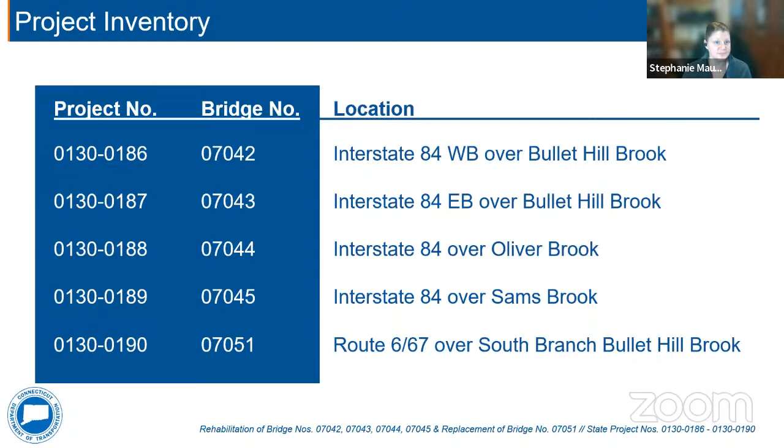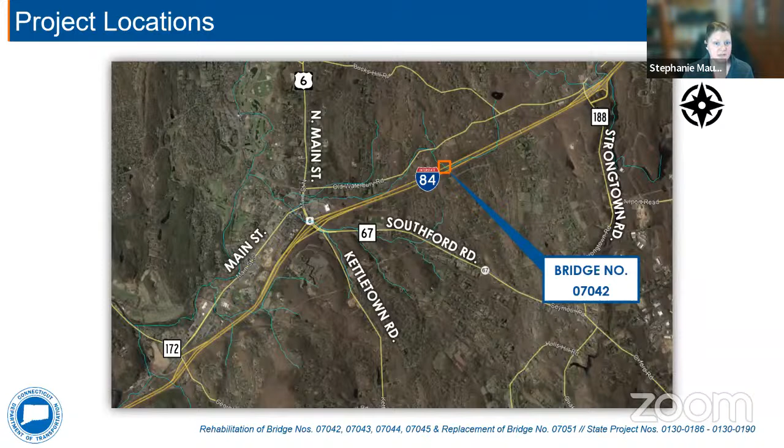We've provided this slide to help you get your bearings along the I-84 corridor. We'll start with bridge number 7042, placed along Bullet Hill Brook. You'll see that Bullet Hill Brook is a circuitous brook that goes underneath I-84 and then back through the eastbound lanes and then the westbound lanes. Bridge number 7042 refers to only the portion that traverses the I-84 westbound lanes in this location.

Next, you'll see bridge 7043 just upstream of that, and it crosses only the I-84 eastbound lanes.

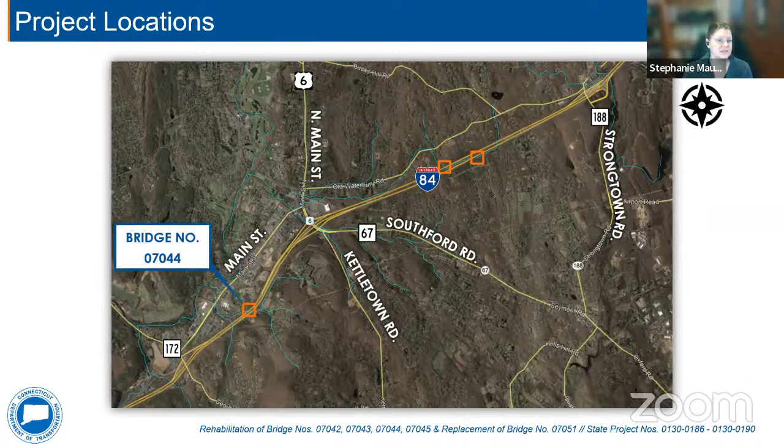Next, we have bridge number 7044. This brings Oliver Brook across both lanes of I-84.

And now we have bridge number 7045. This conveys Sam's Brook beneath I-84, both lanes, both directions.

And lastly, we have bridge number 7051. This is the bridge that crosses beneath the intersection of Route 6 and 67 and the I-84 eastbound ramps.

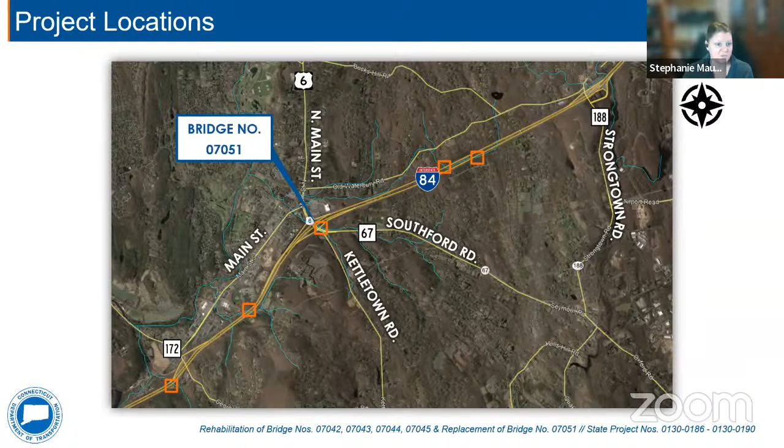During the course of this presentation, you may hear us use terms that aren't necessarily familiar to you, so I'd like to introduce you to them before moving on. You've heard me referring to bridges because the Department of Transportation considers all culverts over 6 feet in diameter a bridge. A culvert is essentially a large pipe. Each of our projects tonight are culverts.

In this figure, you can see the pipe beneath the roadway, supported at the outlet by an end wall, or a wall that's built to surround the pipe. There's also a head wall at the inlet, which you can't see. And each have wing walls, which support the embankment surrounding the pipe.

You will hear us referring to the invert. This is what we call the lowest point of the pipe, or the flow line, referring to where the smallest amount of water flows within the pipe.

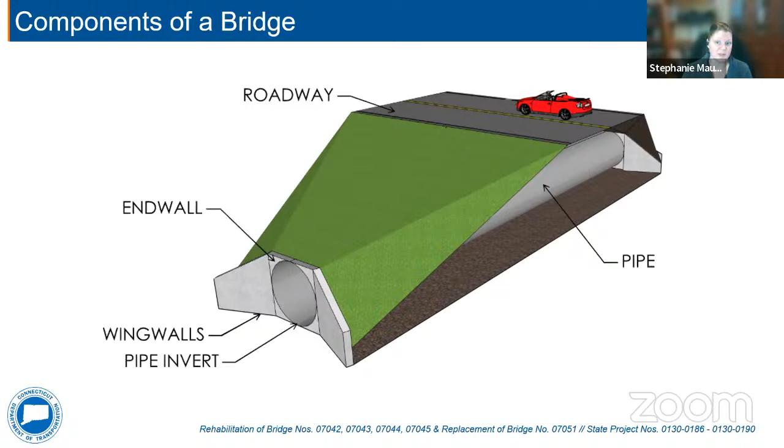All 5 of our bridges today were built in 1961 with asphalt-coated corrugated metal pipes. The first 4 are beneath Interstate 84, which has an average daily traffic of approximately 72,000 vehicles per day. These bridges range in diameter from just over 6 feet to 10 feet, with lengths ranging about 130 to 325 feet. The bridges are supported on each end by either concrete cradles and collars or head walls and wing walls.

A concrete cradle can be seen in the lower left corner. It's basically a large block of concrete that is set in the earth and the pipe sits on top of it. This type of supporting structure is accompanied by a concrete collar, as seen in the center right photograph. The pipe itself is cut back along the slope, also called a mitered edge, and concrete is poured around it to stabilize the earth around the pipe. The head wall, end wall, or wing wall type of structure is shown in the upper left-hand corner.

Each of these structures are beneath approximately 8 to 30 feet of fill.

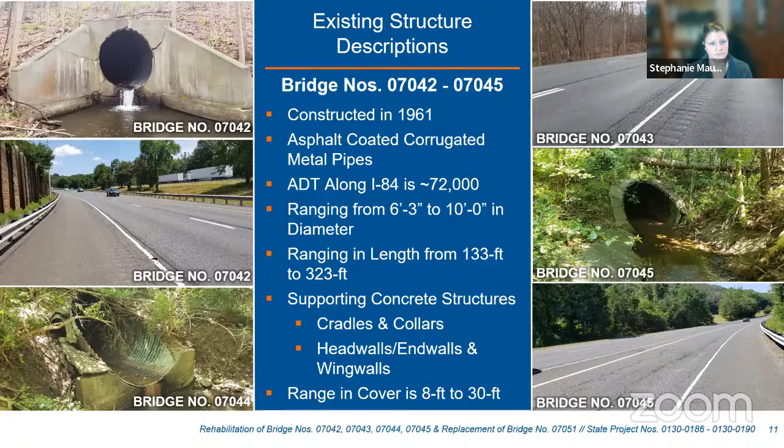The purpose and need for these projects is essentially to address the structural condition of the pipe. The state performs biennial inspections on all bridges in the state and rates each component of the structure on a 0 to 9 rating scale, 0 being that the bridge has failed and 9 being the bridge is brand new. Our ratings here range between 3 and 5, where 3 is serious condition, 4 is poor condition, and 5 is fair. For relevance, generally a brand new bridge will bring the structure up to a rating of 7 or 8 once we rehabilitate it.

So here we address the invert deterioration that is due to rust and abrasion with voids beneath the structure. You can see that in the middle left picture. We also have cracking and separation of the supporting structures. You can see that on the top left for the cracking within the wing wall and head wall. And then on the bottom right, you can see that the concrete cradle and collar has separated from the structure.

We also have perched outlets out there with these bridges. You can see that in the lower left picture. Basically, the water scours or washes away the soil at the outlet around the supports, causing a waterfall effect. This continues to erode the earth below the structure, called undermining. Sometimes we see a loss of backfill, which is the soil around the pipe or behind the structure, and it seeps through these perforations, which can cause pipe deformities.

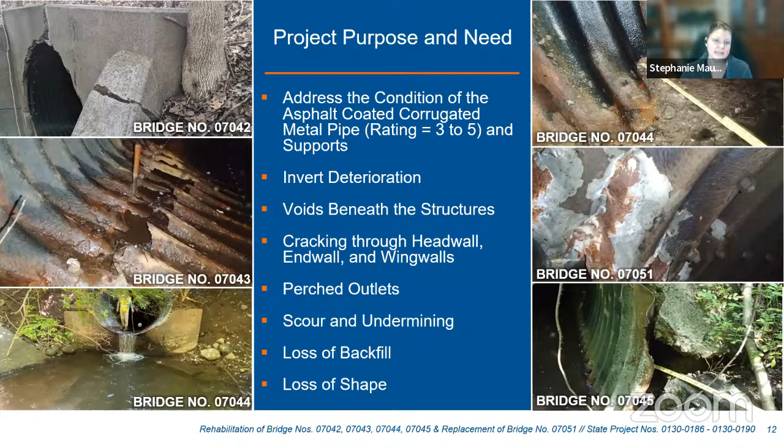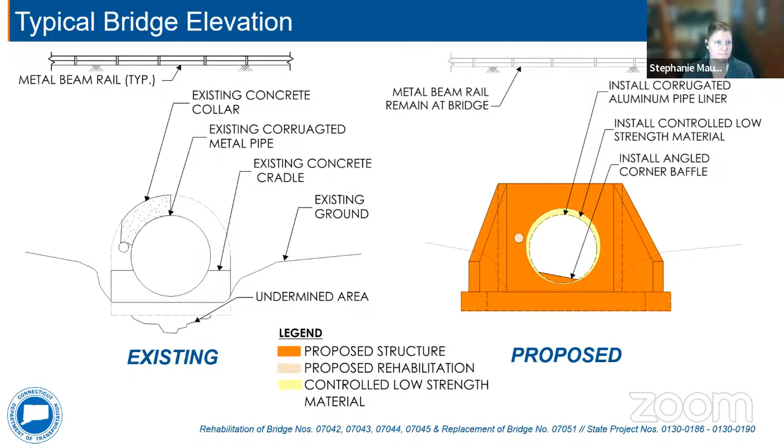For the next several slides, I'll walk you through the process of rehabilitating a culvert. This does not represent any single bridge tonight, but it will act as a conglomerate of the different parts that may be part of one project or another, essentially just trying to walk you through what might be out there.

We'll begin with the existing longitudinal section. Essentially, we are cutting through I-84 perpendicular to the travel direction. So again, this is what our existing bridge would look like. We would begin by cleaning the pipe itself and filling any voids around and beneath the pipe.

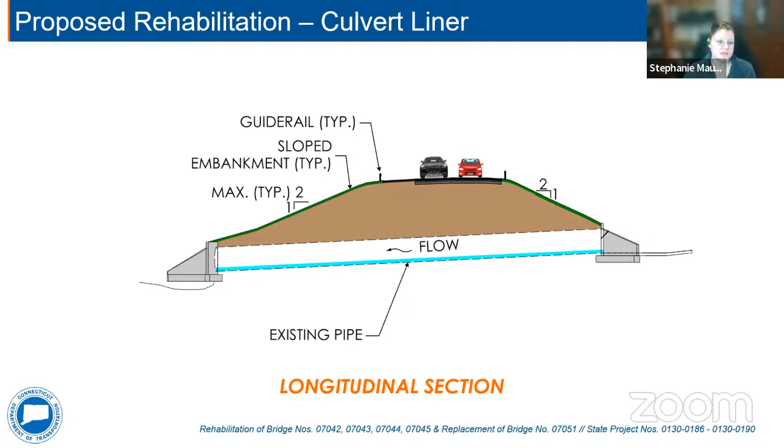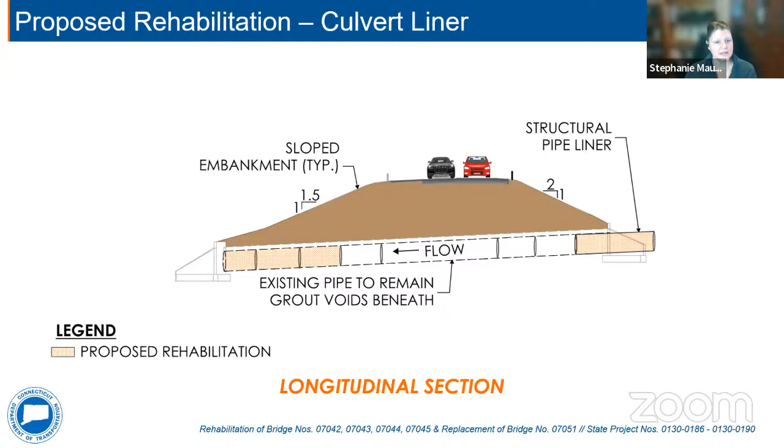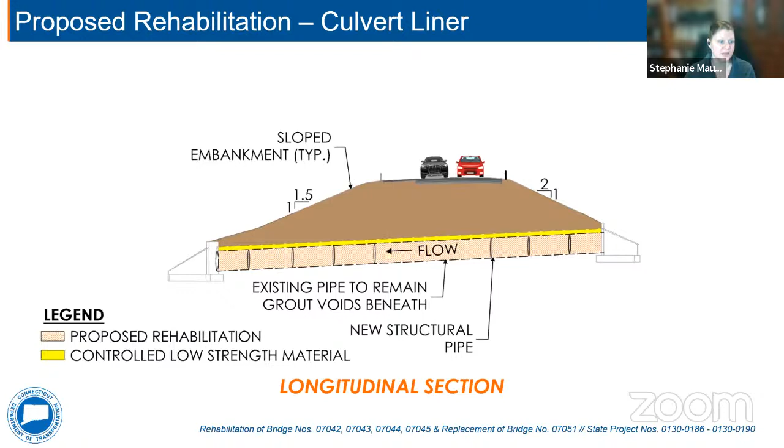Slip lining the structure is what we'll do, essentially inserting a smaller pipe within the larger pipe, connecting it piece by piece. Once that is finished, we would fill the annular space, or the space between the smaller pipe and the larger pipe, with controlled low strength material.

Some of our projects do have concrete lined channels at the entrance, and we will be looking to remove that channel essentially to aid in fish passage. It does exist for 2 out of 5 of our structures.

And then we would construct the new head wall and wing wall. Once that is complete, we would restore the channel with boulders and natural stream bed material.

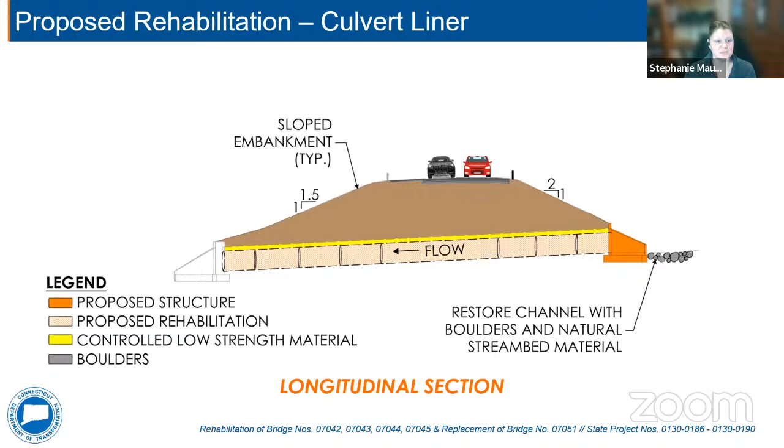Next, we would look to construct the new end wall and wing wall. You can see that now bright orange to the right.

And then lastly, for some of these projects, we will be installing a concrete fishway. Essentially, that acts as a fish ladder to also aid in fish passage. We'll be doing that for 2 out of 5 of our structures tonight.

As you can see, the work is done from below and is not anticipated to affect mainline traffic on I-84 during peak hours. Next, I will take you through each individual project.

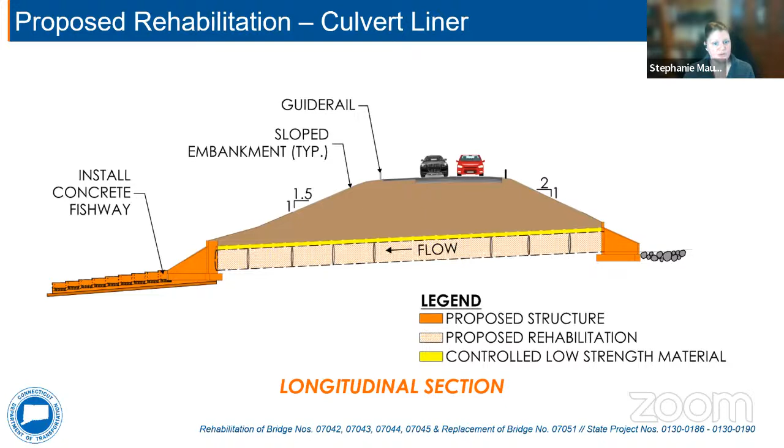To start with, we have state project number 130-186. This is bridge number 7042. It's Interstate 84 westbound over Bullet Hill Brook.

So the aerial image that you see on your left screen, you can see I-84 bisecting the image diagonally, and Bullet Hill Brook is shown with the teal blue patterned line, flowing from east to west. This bridge is about halfway between exits 15 and 16.

As you can see in the top right, this bridge does have the traditional end wall, wing wall, and it has a perched outlet. In the lower right, you can see that the entrance is lined with a paved channel that we'll be removing for this bridge.

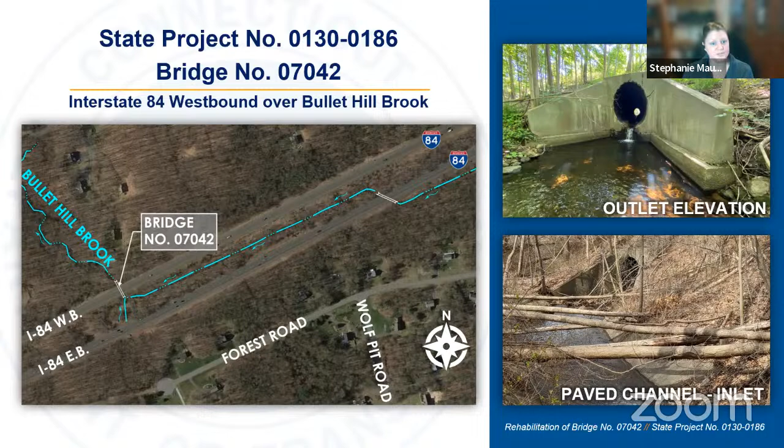As I stated before, during construction, a portion of the guide rail will be removed and temporary traffic barriers will be in place. Temporary off-peak lane shifts may be needed for site access.

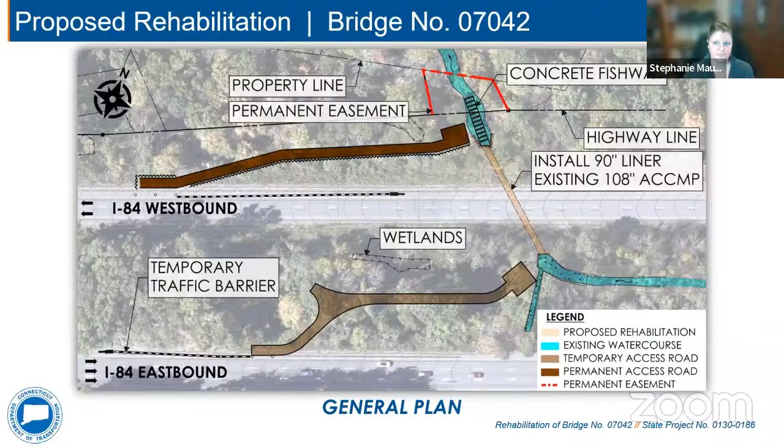We do not anticipate any utility impacts for this project. There are 3 Connecticut Department of Energy and Environmental Protection permits. I will refer to the agency as Connecticut DEEP, or just DEEP, moving forward in this presentation. These permits are individual inland wetlands, stormwater discharge, and the pre-construction notification.

The pre-construction notification for the United States Army Corps of Engineers is necessary as well, and I will refer to them as U.S. Army Corps on future slides. As noted in the previous slide, there will be 1 permanent easement for the concrete fishway installation and maintenance.

For this project, we carry an opinion of probable cost as approximately $2.8 million. It is currently 100% state funded, and construction is anticipated to begin in the spring of 2026.

Next, we have state project number 130-187. This is bridge number 7043, Interstate 84 eastbound over Bullet Hill Brook.

Again, you can see the same image here with I-84 running diagonally across your screen, and Bullet Hill Brook is in teal, flowing from east to west.

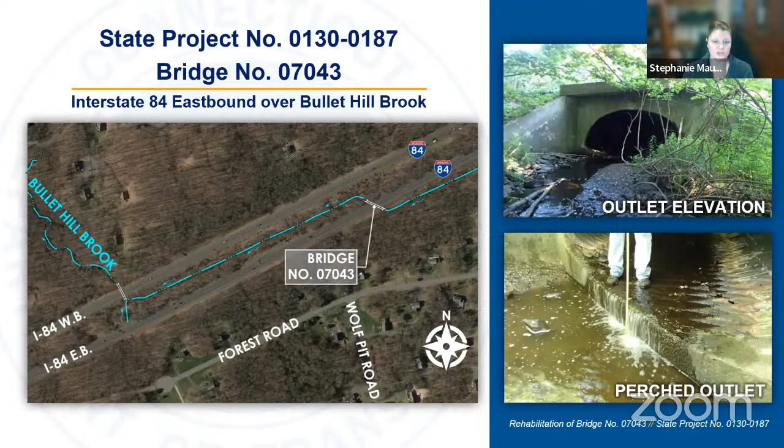Again, I-84 runs left to right through the center of the image. As stated previously, we are looking to repair the support structures. We will slip line this one as well, this one's an arch. The existing 112-inch by 75-inch arch will be lined with a 79-inch by 68-inch liner.

Then we will look to install rock weirs to aid in fish passage because the perch doesn't warrant a fishway, but it still needs to allow fish to pass. You can see in the bottom portion of your screen, we will have a right-of-way impact, which is a temporary easement for this case. It's for grading to restore the embankment and maintain the flow pattern of the brook.

We again have 2 access roads. Downstream will remain for maintenance, and the upstream access road will be temporary. During construction, a portion of the guide rail will be removed and temporary traffic barriers will be in place. And we have off-peak lane shifts that may be needed for site access.

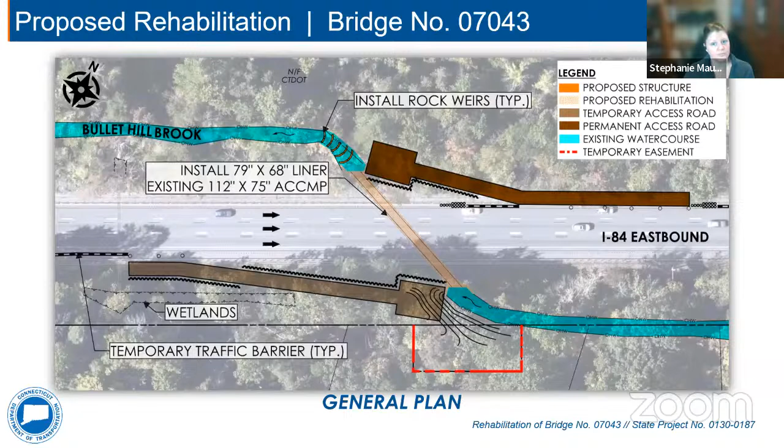We do not have any anticipated utility impacts. We are again looking at DEEP permits, individual inland wetlands, pre-construction notification, and the U.S. Army Corps pre-construction notification as well. As stated previously, we do have one single right-of-way impact. It is a temporary construction easement.

The anticipated probable cost for the structure is approximately $2.2 million. Currently, it is 90% federally funded and 10% state funded. Construction is anticipated to begin in spring of 2026.

Next, we have state project number 130-188, bridge number 7044. This is Interstate 84 over Oliver Brook. Bridge 7044 conveys Oliver Brook beneath 84 near Peter Road and the Rochambeau School. At the top right, you can see this one has a cradle support and a significantly perched outlet. The picture on the lower right shows a concrete drainage channel alongside the highway that has been washed out and is no longer functioning as it should.

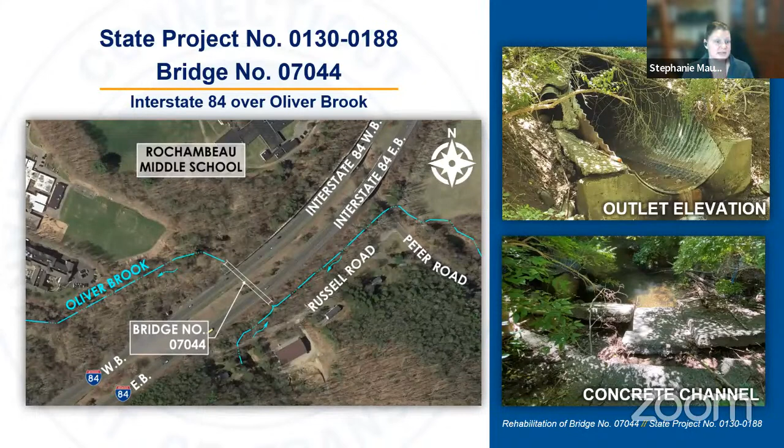Again, I-84 runs through the center of the image. For this bridge, we are looking to repair the support structure at the inlet and install a trash rack. We will be slip lining the pipe, replacing the structure at the outlet, and adding a concrete fishway. The liner size is going to be a 108-inch liner inside of a 120-inch pipe.

We are looking to reroute the damaged concrete swale and rehabilitate it using riprap or large rocks to slow the water. The concrete fishway will require 2 permanent easements for construction and maintenance. 2 permanent access roads will be constructed along the shoulders of I-84 and will remain for future maintenance. During construction, a portion of the guide rail will be removed and temporary traffic barriers in place. And again, we will have off-peak lane shifts possible for site access.

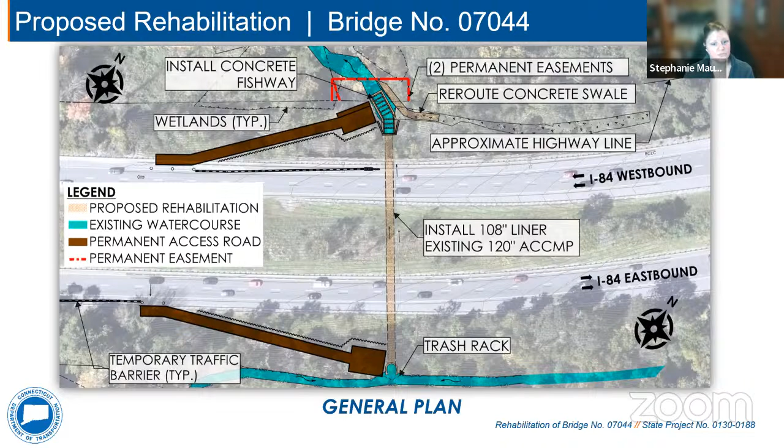We do not have anticipated utility impacts for this location. We do also have the anticipated environmental permits, which are the Connecticut DEEP Individual Inland Wetlands Permit and pre-construction notification, with the U.S. Army Corps pre-construction notification as well. As stated, we have 2 right-of-way impacts, permanent easements for the concrete fishway for installation and maintenance. The anticipated opinion of probable cost is just under $3 million, currently 90% federal funded and 10% state funded. Construction is anticipated to begin in spring of 2026.

Next, we have State Project 130-189. This is bridge number 7045, Interstate 84 over Sam's Brook. As you can see, it runs diagonally in the aerial image, at exit 14 between the on-ramp and off-ramp of the eastbound lanes. And for this one, it also has the concrete inlet that will be removed.

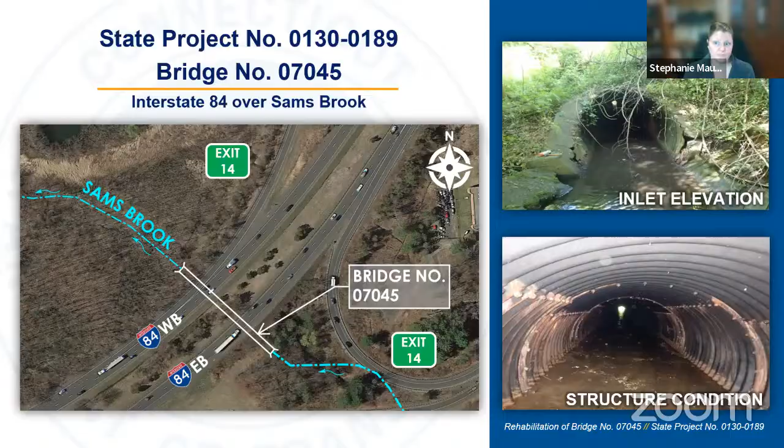Here might be a better image of this structure. We are looking to slip line this structure as well. We have an existing 84-inch pipe that we will be lining with a 66-inch liner. This structure does have the concrete collar and cradle, and we will be replacing these structures with the end wall, head wall, and wing walls. We may need to reroute the bituminous swales that come into the inlet, depending upon the placement of this structure.

We are looking to have 2 access roads. The downstream access road will remain for maintenance, and the upstream access road will be temporary. And again, during construction, a portion of guide rail will be removed along the on-ramp, and temporary traffic barriers will be in place. Ramp lane shifts and shoulder closures are anticipated for site access.

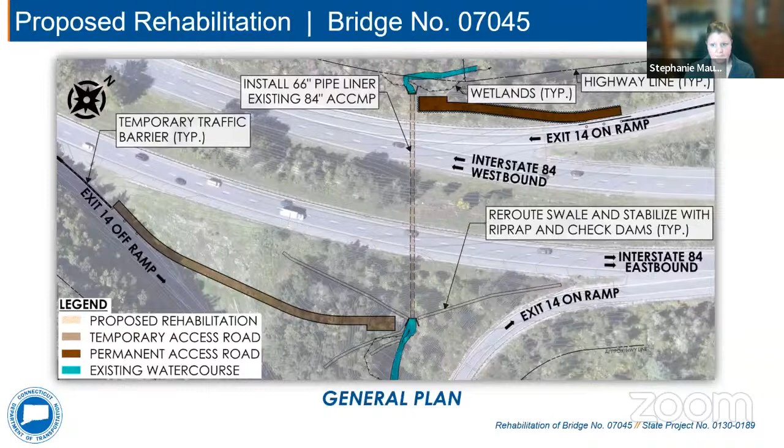Again, for this site, we do not have anticipated utility impacts. The environmental permits we'll be looking to get are the Connecticut DEEP Individual Inland Wetlands Permits and the Stormwater Discharge Permit and the pre-construction notification, and again, the U.S. Army Corps pre-construction notification. We do not have any rights of way impacts anticipated for this project.

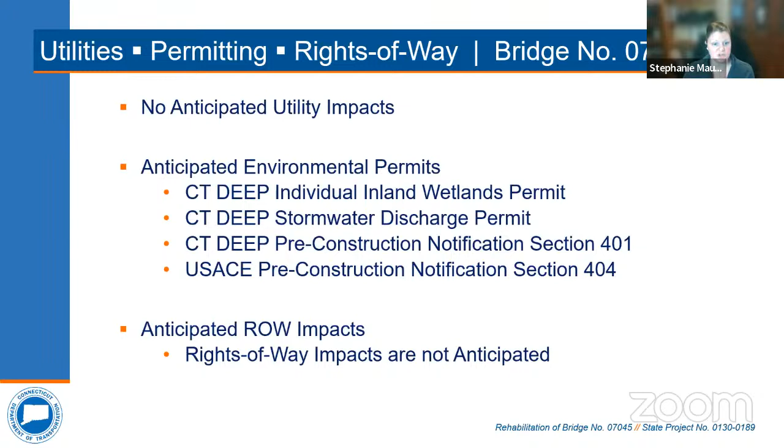Our opinion of probable cost is approximately $2.3 million, currently 90% federally funded and 10% state funded. Construction is anticipated to begin in spring of 2026.

And now I will hand the presentation over to Mike Woods with BL Companies to share the details for project 130-190.

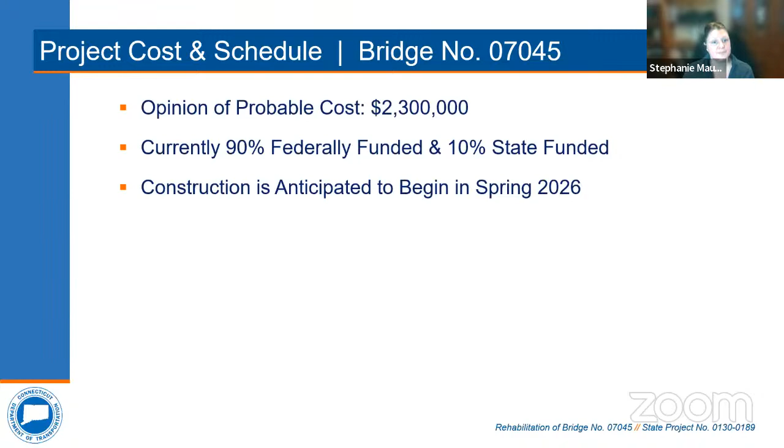Thank you, Stephanie. All right, we are on culvert number 5 here. Appreciate everyone bearing with us as we go through a lot of information and a lot of projects. So our 5th project tonight is project 130-190. It's bridge 7051, which carries Route 6 and 67 over the south branch of the Bullet Hill Brook.

Shown here in the aerial image, this structure crosses diagonally through the intersection of the exit 15 on and off ramps and Route 6 and 67. It traverses almost perfectly diagonally through this intersection, so that makes it a fairly unique site for this project.

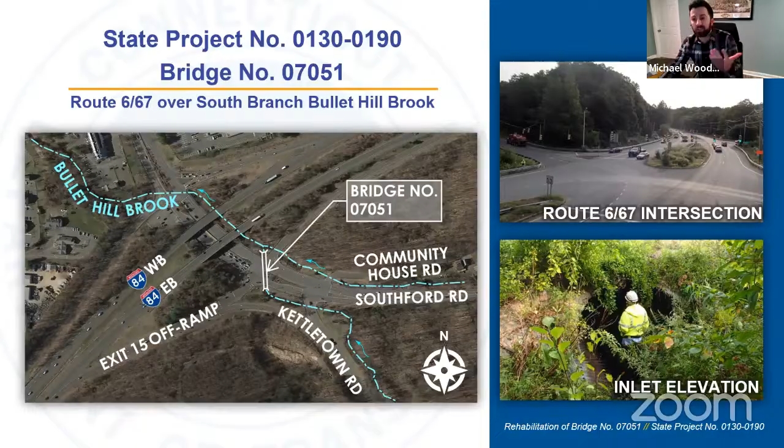The existing structure is approximately 9 feet wide by 6 feet tall. Like all our other structures, it's an asphalt coated corrugated metal pipe. This one is an arch, so that's why we have the height and width varying dimensions.

For this project, we are actually doing a full replacement. This project differs from the other 4 we just presented—we are totally removing the existing structure and going back in with a 12-foot wide by 5-foot high box culvert. The length of the new box culvert will be approximately the same as the existing structure, about 170 feet.

Shown in the images here in orange, that is our new structure. Depicted in yellow are the limits of full depth roadway reconstruction, and depicted in gray hash is the limits of mill and overlay, basically cleaning up the pavement structure out there.

The existing structure is fairly shallow out here. Again, unlike the prior 4 projects that Stephanie just went through, we're beneath about 18 to 30 inches of material. So we do not need access roads to get down and work on this project. It is shallow enough that we can basically get off the roadway and work on this bridge.

As part of this project, we do have a replacement or slight modification of our drainage system. The thin blue line that crosses over the existing structure in the image here is the existing drainage. We will be relocating that during the replacement of the bridge and have it outlet to the northeast. You can see the thin orange line that extends to an existing catch basin that will also be replaced as part of this project, just to the east of the I-84 eastbound on-ramp.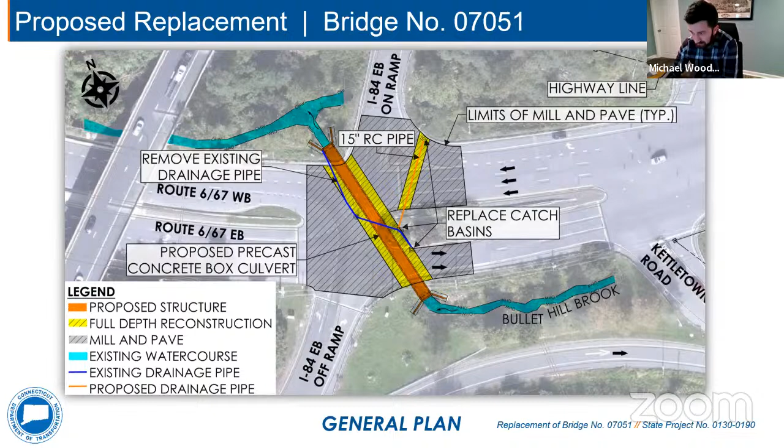Moving on, we'll talk about the staging for this project. The department is utilizing accelerated bridge construction techniques. Primarily, that means we're trying to build this as quickly as we can while disturbing or impacting the traveling public as little as possible. So the proposed structure is a precast concrete box culvert.

The culvert will be essentially built in small sections off-site, and they will deliver them to site in about 5-foot sections. During construction they lift them off the truck and place them in, connecting them essentially like a Lego set. Again, utilizing accelerated construction techniques, we will utilize precast wing walls at the inlet here. Again, the orange outline is the proposed structure.

The approach we're taking for construction out here is utilizing 2 stages. Each stage will utilize a long weekend, starting after the Thursday evening commute or peak period, and extending through to Monday morning, opening up traffic prior to the AM commute.

Shown here is the approximate layout of the traffic pattern out there. Currently for Route 6/67 eastbound, we have 2 through lanes and 2 turning lanes. We will be reducing the lanes out there to 1 through lane and 1 left turning lane onto the I-84 eastbound on-ramp. That Route 6 eastbound through lane will also cross over to the other side of Route 6.

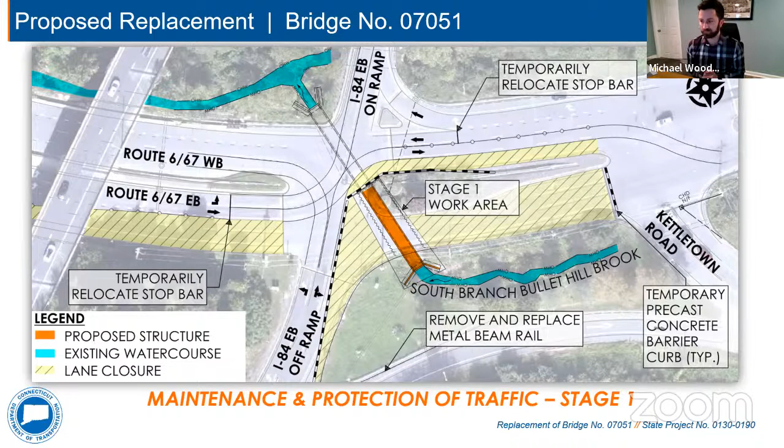Moving to stage 2, we will essentially be doing the opposite of what we did in stage 1, with, I would say, one major exception.

As you could probably assume out here, with the way that the proposed structure crosses in front of the I-84 eastbound on-ramp, we are not able to maintain that left turn traffic movement. So the Route 6 eastbound to I-84 eastbound on-ramp turn will not be allowed during this stage 2 long weekend, and that traffic will be detoured. I'll show you that on the next slide.

Before getting to that, we'll also talk about Route 6/67 westbound. That traffic will be shifted to the eastbound side of 6 and 67. This is to move traffic through the site, but then allows us to construct the second half of the culvert out here.

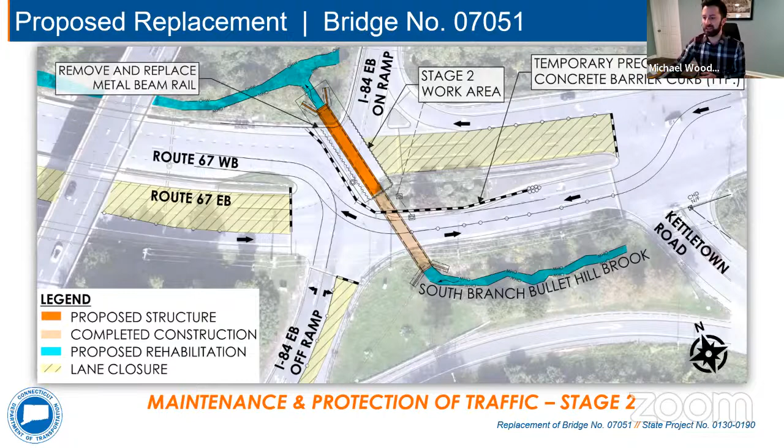Moving on to our detour slide, this will be the posted detour for passenger vehicle traffic. When you get to the intersection for the exit 15 on-ramp, you will have advance warning that option isn't available, and we'll have detour signs posted for you to continue down 67 to the intersection of 188. We'll take a left on 188, head north, and then get onto I-84 at exit 16. This detour is approximately 4.8 miles, but it does advance you along I-84, so it really adds only a couple miles to your total trip.

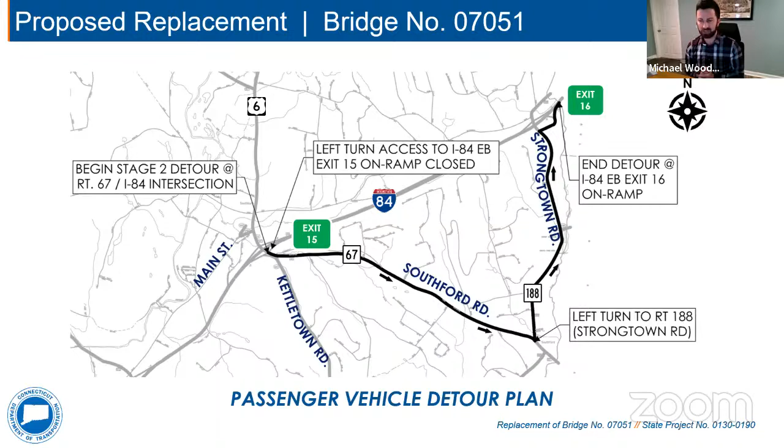One of the issues we have with this posted route is the tight left turn from 67 to 188. So in addition to this detour, we will also be posting a truck detour. Moving on to the next slide is our posted truck detour, which will utilize the exit 15 on-ramp onto I-84 westbound. Trucks will then take I-84 to exit 14, get off there, and then get back onto I-84 eastbound, and continue off to their final destination. This is the simplest route for trucks to get around the site while maintaining state roads, and this is why we'll be posting this route for trucks.

We'll have advance warning out there. At least two weeks prior to construction, we'll alert motorists that the detours will be implemented, and make sure everyone in the area is aware of what's going on, so that we have as few headaches as possible during construction, and hopefully people can avoid the area during construction as well.

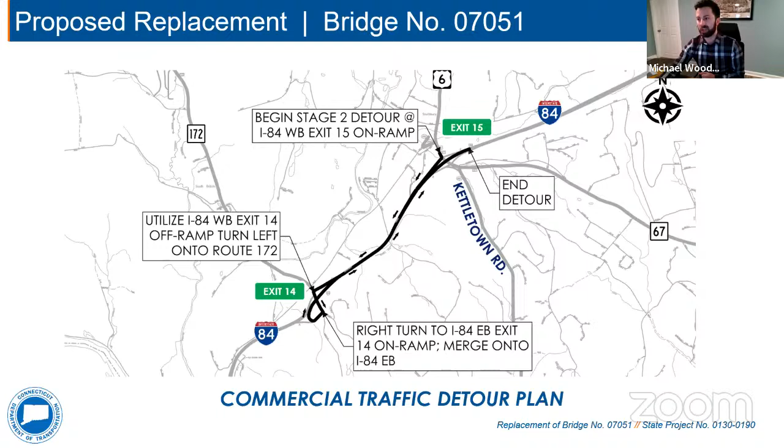So moving on, talking about utilities at our site here. We do have aerial electric and telecommunication along the southern side of the site. We also have underground utilities, which unfortunately makes construction a little bit more complicated. We have an existing water main along the north side, an electric duct bank along the south side, and a telecommunication duct bank along the north side of Route 6/67. All of these facilities will be maintained during construction, and no relocations are expected as part of this project.

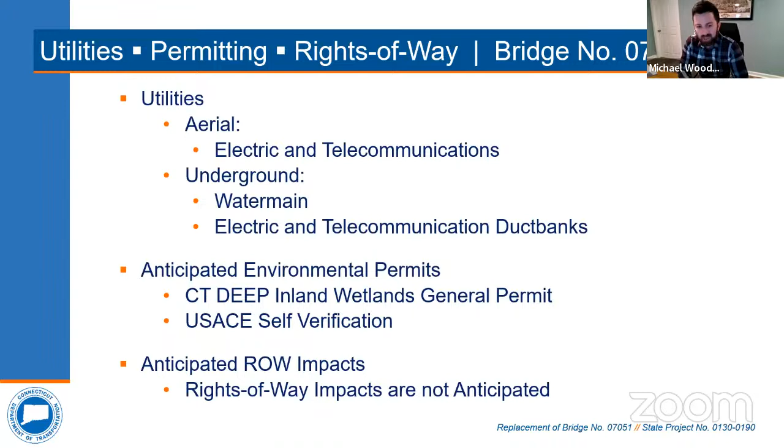We do have a couple permits here: the DEEP Inland Wetland General Permit and the U.S. Army Corps Self-Verification. We do not expect to have any rights-of-way impacts as a result of this project.

The opinion of probable construction cost for the full replacement of this bridge is approximately $2.3 million. Currently it's an 80-20 split for federal and state funding, 80% federal funded, 20% state funded. Like the other projects we discussed today, we expect construction to begin in the spring of 2026.

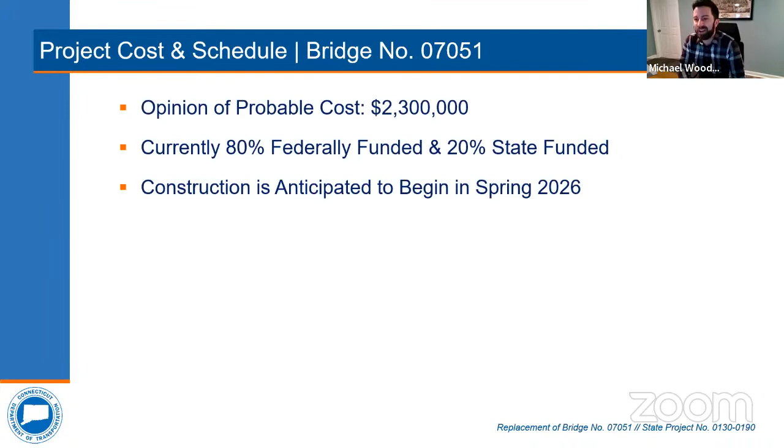So now I'll be handing the presentation off to Matt Giannakopoulos. I think I did okay pronouncing his name. I was doing my best to pronounce it while I was listening to Stephanie. So he'll be taking over from here.

Thanks, Mike. As Mike said, I'm Matt Giannakopoulos. I'm a project coordinator with the department's Division of Rights of Way. It's our office's responsibility to acquire the property rights needed for transportation projects. As Stephanie mentioned during the presentation, some of the projects require the acquisition of some easements. So I'm here tonight to give a brief rundown of our acquisition process.

First, I want to elaborate a bit on what we mean by an easement. An easement is a type of property right that the department acquires when it needs to use a portion of somebody else's property for a specific purpose, but doesn't need to own it outright. So when we acquire an easement, the actual ownership of the property remains unchanged. Any property rights required for these projects will be acquired in accordance with Connecticut General Statutes sections 13A-73 and 13A-98E. Whenever there is federal money used in any phase of a project, the department must adhere to what is known as the Uniform Act.

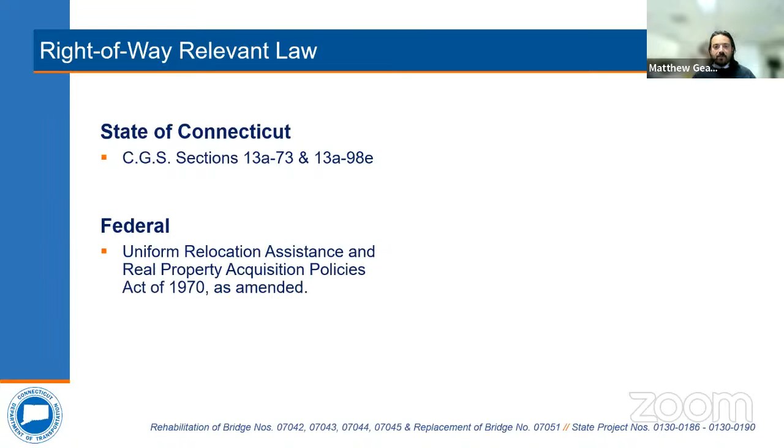Once the project design has progressed to the point where we know exactly what property rights we need and we're ready to begin the right-of-way acquisition process, each affected property owner will receive a letter of intent to acquire from our office, along with a property map which depicts the exact rights to be acquired.

At that point, we determine the fair market value of those rights, and we use that to establish an offer of just compensation. That offer gets sent out to the property owner in writing, and a right-of-way agent is available to meet with the owner. They can explain the impacts to their property, go over the details of the project, and explain how the state developed the offer. From that point, the property owner has a reasonable time to consider the offer and enter into negotiations if they so choose.

Once an agreement is reached, the state prepares all the necessary paperwork to transfer those property rights. So they'll prepare and record a deed and the property map on the town land records.

However, if negotiations reach an impasse, the state may acquire the rights it needs through its power of eminent domain. So what happens in that case is the department files a notice in the local superior court, along with a monetary deposit in the amount of the state's offer of just compensation.

The property owner has 6 months from the date of that filing to appeal if they felt that the department's offer was inadequate. Now, whether or not the owner elects to use their right to appeal, the money that was deposited in the court is available to be withdrawn by the owner at any time.

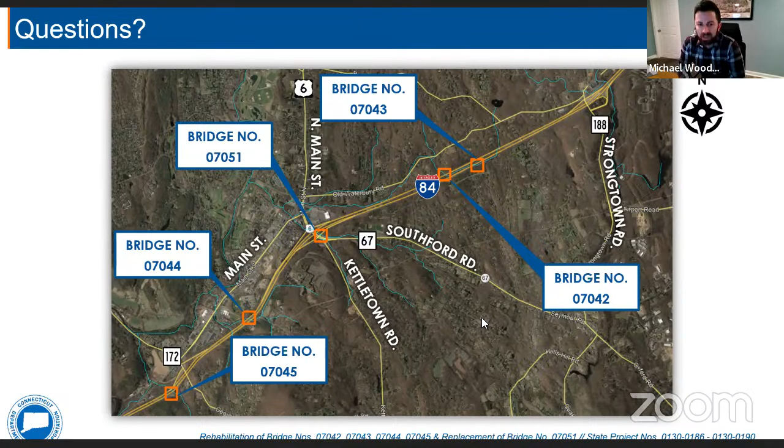But the approach that we take when we do these projects is we try to obtain a 75-year lifespan on them. We're doing a reline, but the reline is essentially creating a whole new structure. The host pipe is really just there, we'll say for show at this point. When we leave the project, the new relined pipe is going to be the one that supports everything in there.

And we base this off of a 75-year life cycle. Some of these buried as deep as they are can often last even longer than that because they don't see the same salt spray that some of our other typical bridge structures see. So these buried structures, particularly the ones under I-84, can last 75 years or longer. And that's what we're projecting for life out here.